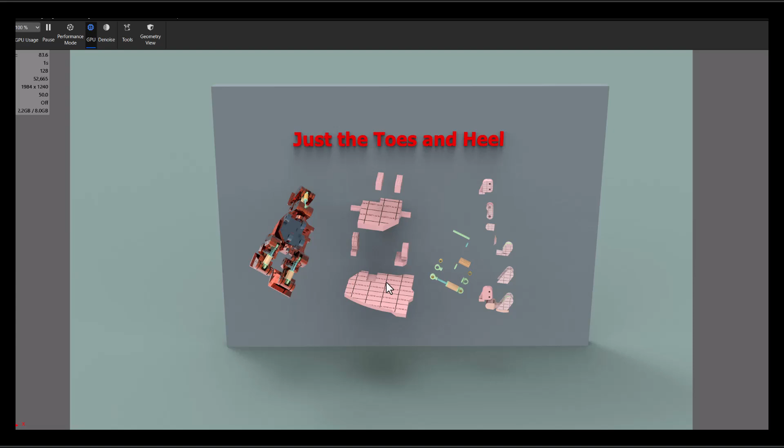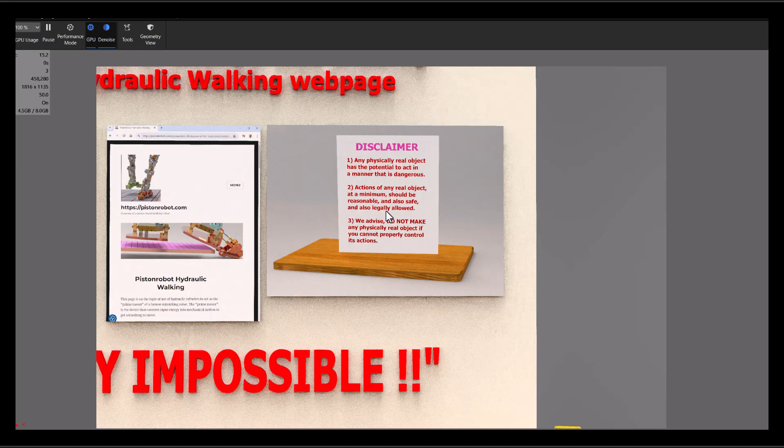And we're talking about creating a physically real item. I want to demonstrate that I am correct about these hydraulic cylinders, but it is a real structure that has fluid and pressure in it, and that is an element. It's a pressure vessel. Any physically real object could potentially hurt somebody.

And my advice is, if you are managing a physically real item, you should manage it in a manner that is legally allowed and reasonable and safe. And if you cannot manage it in that manner, then it is my advice that you do not create it as a physically real item. And now we'll go look at some other things.

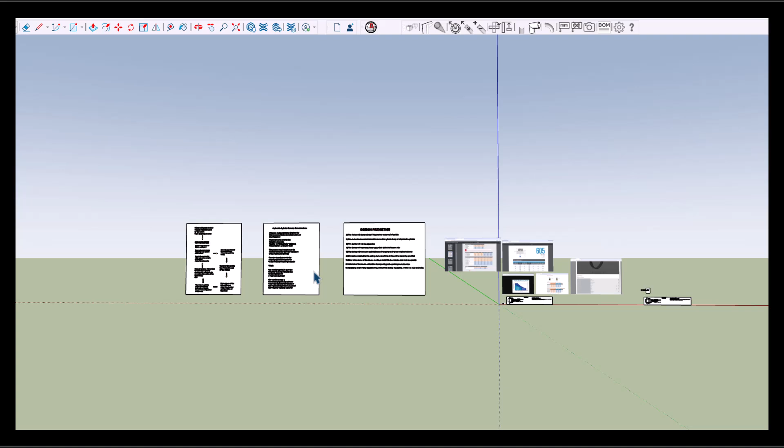All right, let's take a look at some of the drawings. And we will take the robots and tell them thank you. Thank you for parading around and showing us how skillful you are as robots. And let's look at the drawing files. And I know there's always an interest in the drawings. And I don't mind the drawings, but I don't think this makes a whole lot of sense if I don't first get out what it is that I'm talking about.

What is the issue? And this to me is just a flow diagram of what's going on with the modern way that they work with robots. And these are human beings that send information to the computer inside the robot, and these people are telling the robot what they want it to do. And the robot central processing unit runs calculations and looks at its algorithms and makes these requests into actual physical commands from the central processing unit.

And these commands are then sent over a network inside the robot to the prime movers of the robot. And these are commands for these prime movers to do something, move something, and they do. And when they make these motions of themselves, they move the robot, and that movement of the robot is noticed by the sensory system, because the sensory system is always monitoring the robot, sensing what's going on, preparing a package of data of the status of the robot, and sending that package of digitized sensory data back up to the central processing unit saying this is what has just happened to the robot.

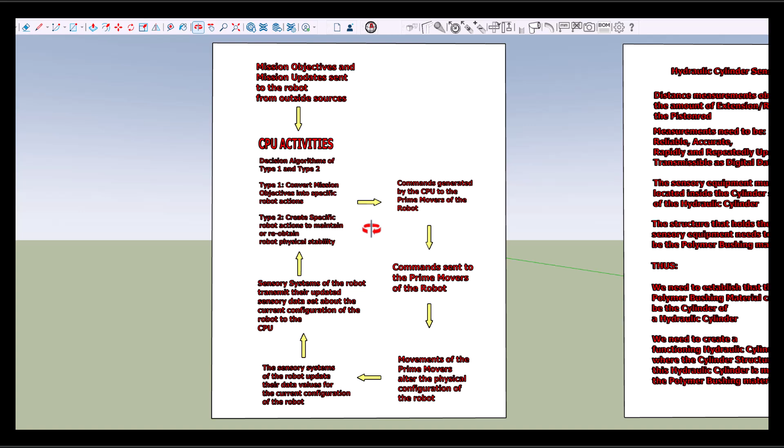And the issue that I'm discussing is that hydraulic cylinders, on a very specific topic of human mimicking robots, if you want to mimic a human being in terms of the power, the strength, the speed, the fluidity, the grace, the beauty of human motion, particularly with a 6-foot-tall robot that weighs 180 pounds, you're not going to do that with electric motor gearhead systems by themselves because they don't have enough power.

And in the hydraulic cylinder sensory world, you need measurement of the extension and retraction of the piston rod, because that's how the sensory system useful to the central processing unit will want information from the hydraulic cylinders. And it needs to be reliable, accurate, rapidly, repeatedly updated. It has to be created and then converted into digital information that can be sent out over a network so that it can go from the sensor to the central processing unit.

The sensory equipment has to be inside the cylinder structure of the hydraulic cylinder, because the hydraulic cylinder itself is made of metal and strong and thick, and there's no extra clearances in there, and you can't put your sensory equipment outside of the hydraulic cylinder and have it sense what's going on inside the hydraulic cylinder. That's too complicated and too expensive.

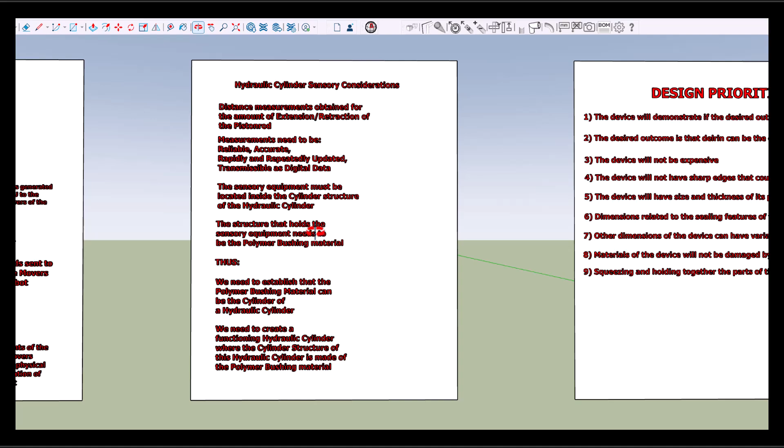I think what we need to do is create a polymer bushing material inside the hydraulic cylinder, because the space inside the polymer bushing material is a space where we can put our sensory equipment. And what I want to do, first thing, is to show that the polymer bushing material can be the cylinder of a hydraulic cylinder. So we need to have a functioning hydraulic cylinder where the cylinder structure is made of the polymer bushing material. And I guess I should take a look at a hydraulic cylinder real quick.

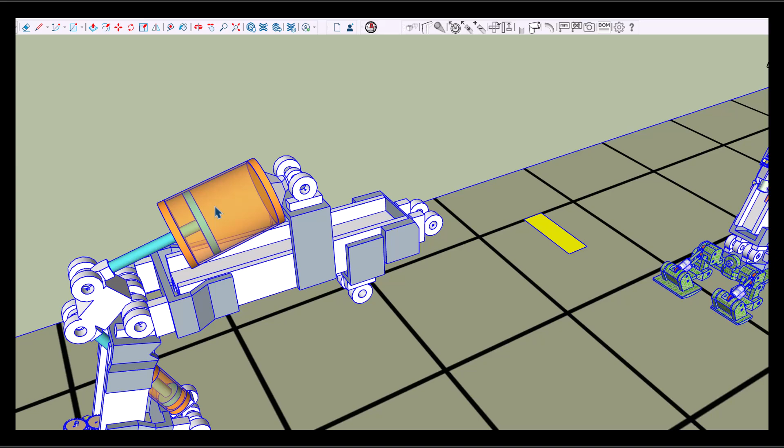And this is the robot. Now, this is back when the robot didn't have arms. But this entire structure is a hydraulic cylinder. And the hydraulic cylinder has a connector on one end. It has an end cap on one end. It has what I call, and this is me just making up definitions, but I'm going to call this structure here the body, or the cylinder body, of the hydraulic cylinder.

So this is not the hydraulic cylinder. This is just the cylinder body, but it's this body that I think needs to be made out of the polymer bushing material. And this entire structure is actually a hydraulic cylinder under the mechanical engineering concepts. And we'll go back to where we were.

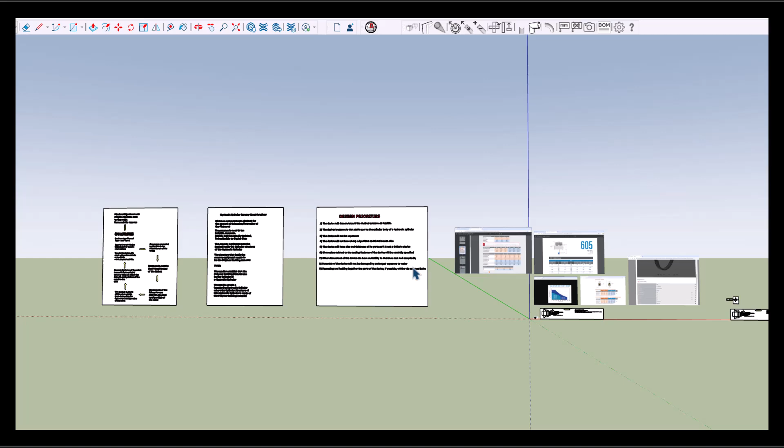And it's the drawings, the drawings, the drawings. Where are the drawings? Where are they?

But I wanted to say a few things about creating something. And I did surgery for a while, for years. And one thing about surgery, you put someone to sleep, you cut them open, you go in there and work around, you get everything the way it needs to be and fix the problem, sew it all back up again, wake them up, you come up there and talk to them, and the next day in the morning you're like, well, you know, I've been thinking about what I did and I'm not so sure I like it.

And so my thinking here would be, let's take you back to the operating room, put you to sleep again, cut you open, and mess around in there, put it all back together again, and let's see how that works. And what you can intuitively understand about human beings is they do not want to do that.

And so my approach to these concepts of creating and working with physical parts is I don't want to make it 3 times. I don't want to fix it. I don't want to test it. It doesn't work. Throw it away. Make another one. Modify that. See what it does. Throw it away. I don't want to do that. I want to think about it and consider it and ruminate and then create it. And the very first time I create it, I want it to work perfectly.

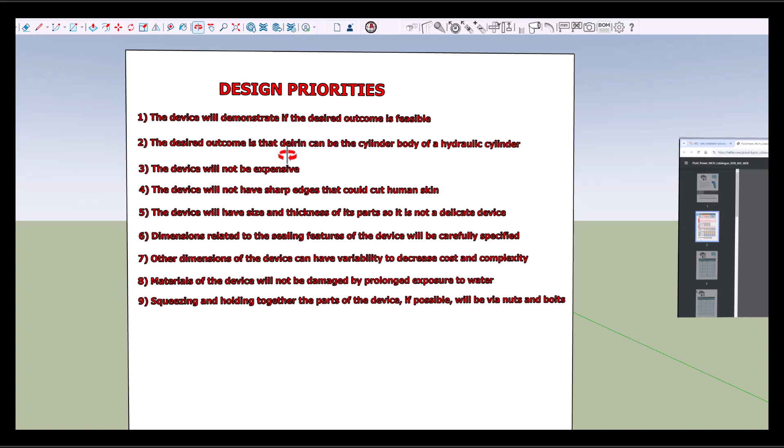So I know the mechanical people are just like, yeah, well, dream on. But I think you can do that as long as you have that as a point of view. And what I want most of all is that it will demonstrate what I'm trying to demonstrate. I want it to work. And the outcome I'm looking at is Delrin, the polymer of formaldehyde, polyoxymethylene, which is created apparently initially by DuPont, and they named it Delrin, that plastic polymer material could be the cylinder body of a hydraulic cylinder.

I do want it that this is not expensive because I have to pay for it. It's remarkable to me that the robot people just have no interest. It's weird, but that's another story.

I don't think when we're fabricating structures out of metal that we should have parts of it that are sharp enough to cut the human skin. I know I'm going to have to put it together and take it apart and put it together and take it apart because I'm testing things. And an absolutely perfect machined right angle, that edge is sharp enough to cut a finger, I think. And so I'm hoping for mostly rounded edges.

Also, every accident I took care of with human beings, they didn't wake up and say, well, today I'm going to go have a car accident and let's see what happens. So I'm not planning to drop this thing. I'm not going to work on it over concrete, but there's always a chance it could slip out of my hand and fall onto the table or maybe fall onto the floor.

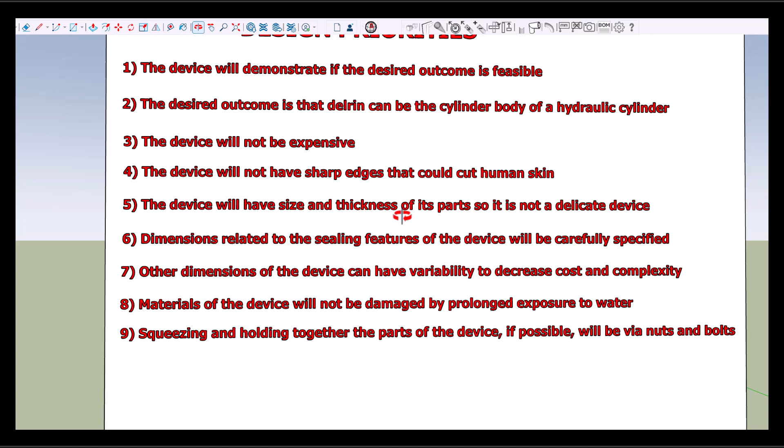I don't want it to be so delicate and so carefully constructed that if it slips and falls, it breaks, or it slips, it falls, it hits the table or the floor, and some part of it bends and makes the whole thing not work. I don't want to do that.

I've been surprised with respect to making a hydraulically pressurized device that will not leak. The people that make seal-up things, seal it so it won't leak fluid, not ceiling like the thing at the top of your room, they are very, very, very specific about how to do this. And I think hydraulics have been around for 140 years. And they don't want people mad at them.

And sometimes what's inside pressurized hydraulic systems are materials that are expensive or valuable or dangerous or reactive, and they don't want it to leak. And they're like, if you will listen to us, it won't leak. And thus, features of this device related to sealing it so it won't leak fluid, I think those features have to be pretty specific. The rest of the dimensions of this structure are simply, I just said, well, how does that look? That seems okay.

I wanted to have rounded edges. I wanted to have enough thickness that it won't break. But I'm happy to defer. I don't run CNC machines. And somebody might say, yeah, well, we can make what you said and it will cost $47. But if you will just listen to us, we're going to keep all the sealing features so it doesn't leak. But if you let us do this and that, we can make it for $8.

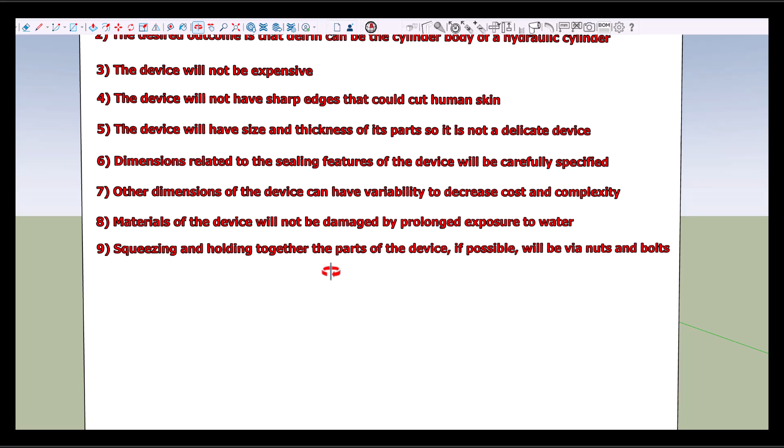And I'm going to say, yeah, that's okay with me. And in terms of, well, it might be $8, but it's not going to be this beautiful piece of jewelry that you have created. And my opinion is, I don't care what it looks like. I just want it to work. I do want the hydraulic fluid in it to be water because I want something that's non-toxic, available, safe, inexpensive.

I do think I'm going to have to put it together and take it apart, and it spills out all of its hydraulic fluid. Well, what do I care? I can go over to the sink and fill a glass up with water, a plastic cup up with water, and refill it.

I like putting mechanical parts together where, if at all possible, I would like there to be bolts, and the bolts are connected to nuts, and the nut and the bolt are screwed together, and that squeezing force is what puts the object together. And the purpose of that is when you have a very valuable metal object that is important and you paid for it and created it, and you have to put a bolt in there and tighten it, if you strip it, you've wrecked it.

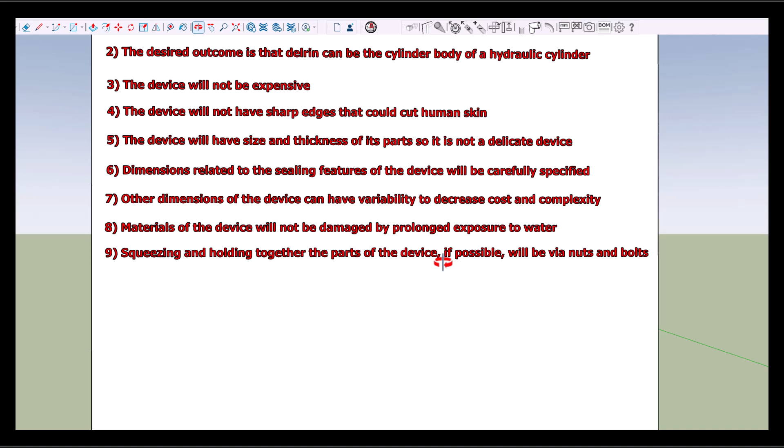On the other hand, if you put a bolt and a nut in there and somehow you manage to strip it, you have stripped the bolt. And you just back it all off or cut the bolt and get another one. And you haven't really done anything to your structure. So these are just some design priorities. I thought I would bring those points out.

All right, so now we can do some discussion about sealing. And again, that's SEAL, not the ceiling up above your head. And the issues associated with sealing: the hydraulic equipment has been around for 150 years or more. And what happens is words that describe things are there, and then different words are used, and then hydraulics are used for the concept of a valve and to seal a valve, and then they're used for construction equipment.

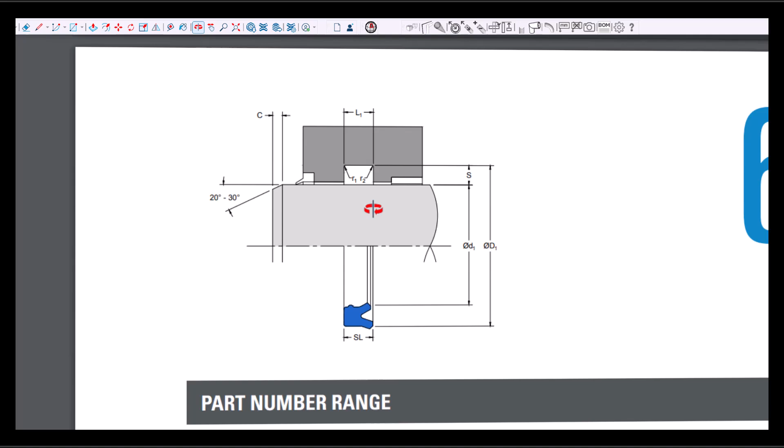And what happens is all of these parts have a variety of different names, and they're all talking about the same thing. And I don't mind that. It's just weird. And so this is the piston rod that goes back and forth, and this is the thing that the piston rod is going back and forth in. And sometimes they call this a gland, G-L-A-N-D, and sometimes they call it a housing, and sometimes they don't say what it is. But this is the part that's moving back and forth. This is the part that's not.

And the issues that are associated with this are something. So the hydraulic fluid is in here, and the hydraulic fluid wants to leak out. So they put something in here to keep the hydraulic fluid from leaking out. But the other thing that matters is this is metal, and it has to be taken to a very fine roughness. This is the piston rod. And you don't want the piston rod to run into the housing, because if it does, then the housing will scratch the piston rod. And once the piston rod is scratched, that scratch acts like a plow that just digs apart this soft seal and ruins it.

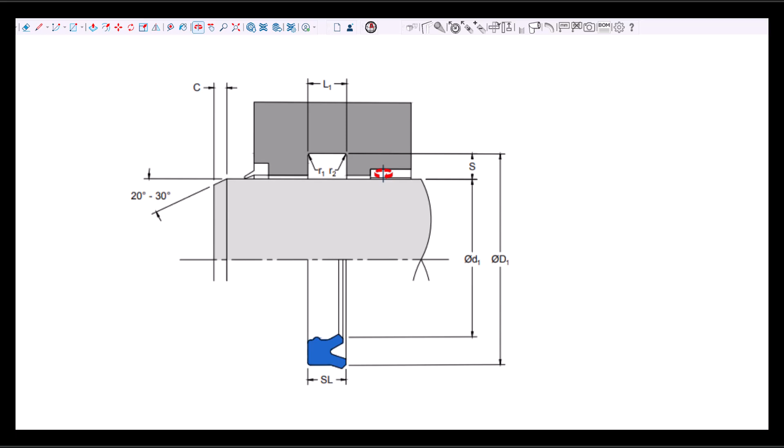So the hydraulic sealing system for moving parts is actually built in two parts. One part is the soft, flexible sealing material that keeps the fluid from leaking out, but there's another part in here that they call a bearing or a spacer or a bunch of other words. And this thing is a padding material that prevents the piston rod from running into the housing. And that just goes on and on and on.

And then they have specifications for, not only is it important what the dimensions are, but it's important what the radiuses are and what radiuses are allowed. And the final thing that's important is what is the roughness of the edges. And those are three separate issues. And I'm going to use a big D. That's sort of the diameter of the hydraulic cylinder. And this is the diameter of the rod. And so the rod I'm going to use is 1/2 inch in diameter. And the piston, the cylinder, is going to be 1 inch in diameter, inside diameter.

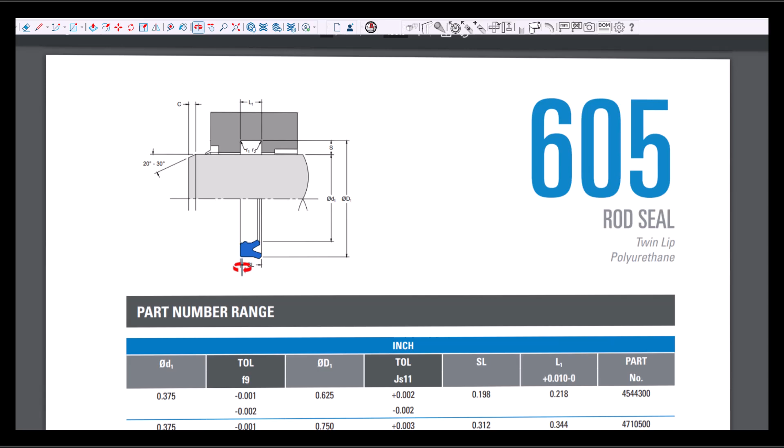So you have to go find little d, 1/2 inch, and it gives you tolerances, and it gives you about how big this distance is that this seal is going to fit into, and it gives you the length of this. And then you'll notice that the length of this is 0.187, but this is what they call a groove. Like I said, all of this technology, names and conventions of how they say things goes back forever. This is the groove, and this is the length of the groove. So the SL, the seal length for a half-inch seal is 0.187, but the groove length is 0.207. You'll notice all of these are accurate to 3 places, so they're not kidding. It's very important that it's just done just right.

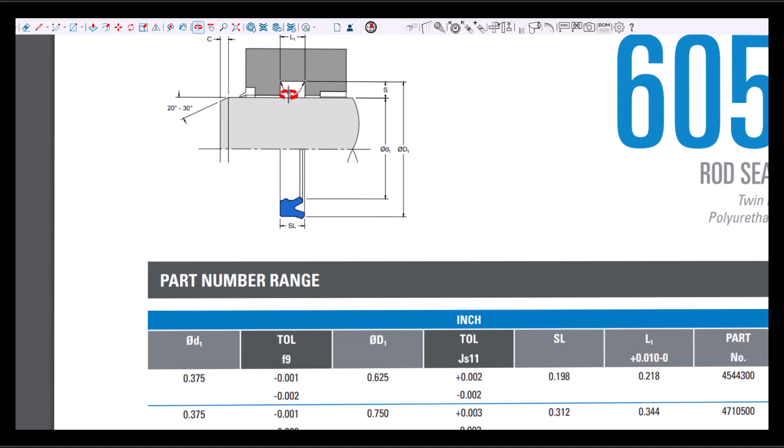Now, there's a thing called extrusion, and I think I'll get to that, but extrusion is where the pressure is enough that it starts pushing the seal into this. Okay, here's the piston rod, here's the housing, here's the seal, and it pushes the seal into this space right here, and that's called an extrusion, and that breaks this and ruins it. And this distance is called the maximum allowed extrusion distance, and this distance has to be small enough that the pressure you're working with will not ruin your seal.

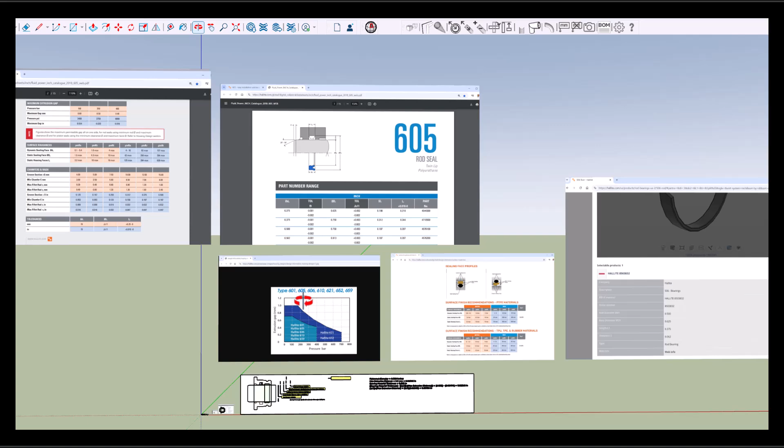And so they give you, this is from Hallite, and Hallite is all over the place, including Asia. So yay, I think we can get these parts and have them mailed. I might be able to go to Amazon and put your address in there. But this is the Hallite 605 rod seal, twin lip polyurethane, can be used in water. And what they give here is, and this I think is like 3,000 pounds per square inch, and I'm going to be way down here at 20 pounds per square inch.

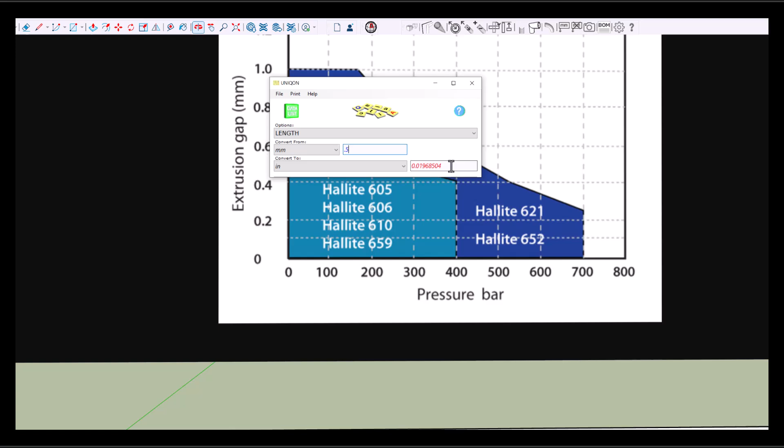But the 605 can have an extrusion gap in millimeters, and I picked 0.5 millimeters, and I work in America, and we use those numbers that Americans use. So we'll convert millimeters to inches. And so 0.5, and this is the way it goes. This goes on and on like this, but 0.5 millimeters is 0.01968 inches. And we're going to see this number over and over again.

All right. So now, I tried a whole bunch of different ways to design this, and I'm going to get back to all that. But these are screen captures where I took a picture of what I found on the internet. And I did want to show you that I made for you a PDF document, 72 megabytes, of all of these screen captures. And we'll go see what that looks like.

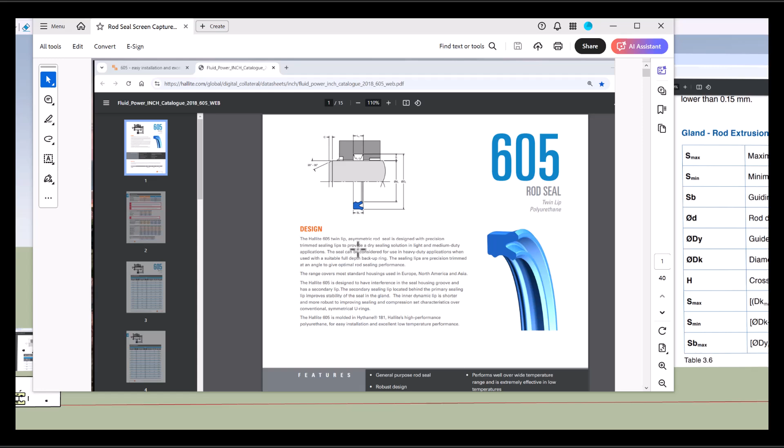And this is showing here in my Adobe, but it's a collection of 40 screen captures. So you can see over here, well, it's big enough. Another thing, Adobe is always trying to help you, and I wish they would stop helping, but they don't.

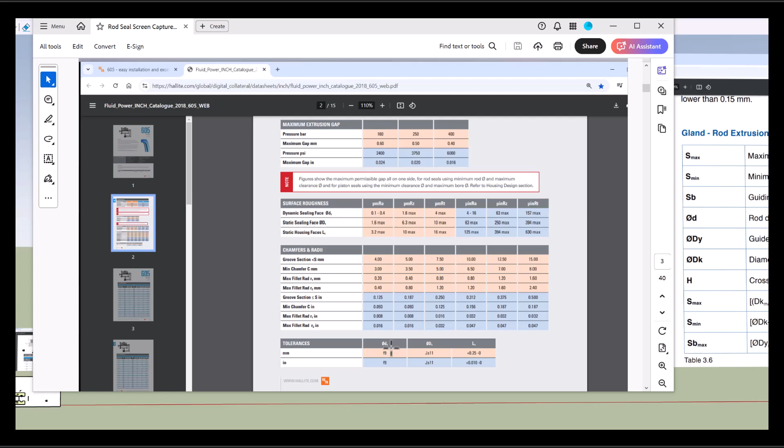But anyway, see, so there is page 2, and this is for that 605, it's the dynamic sealing face, the roughness, the static faces, the roughness, the chamfer, the minimum. These are tolerances. These are specifications that exist for this equipment, and it goes on and on and on. And what I'm showing you is just all of the different screen captures that I have, so that you can learn about this sealing issue.

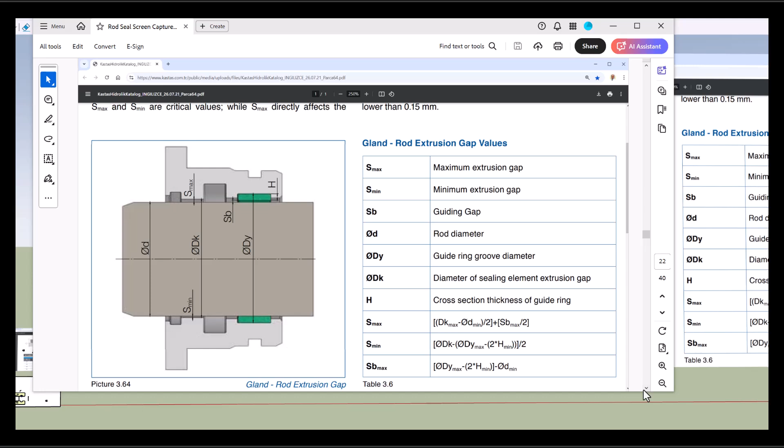You can go out on the internet. All of this is free, but I just thought I would show you all this. And here they go over the surfaces and on and on. Okay, so that's what this is. It's more than you ever wanted to know about sealing. But I'm going to put this in the G drive so you can download this collection of PDF. And these are nothing more than just screen captures of things that I found.

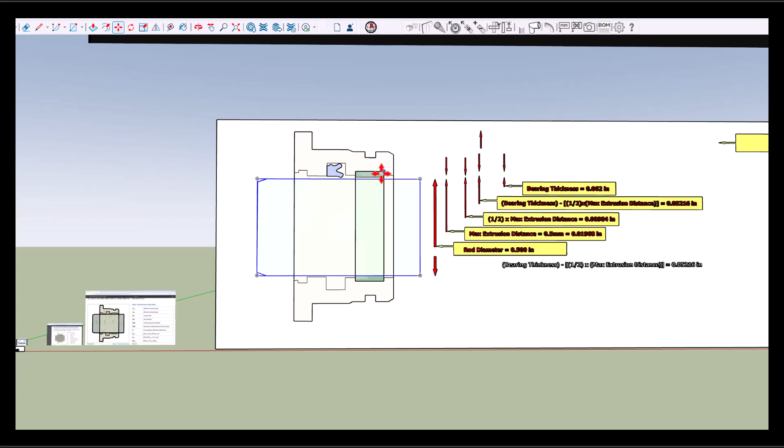All right, so here, and the final thing I'll cover here, this is the piston rod. And the piston rod can bounce up and down inside the housing. Okay? But they don't want the piston rod to run into the housing. So they have this padding material. And the question becomes, say the piston rod went down and ran into the padding material. What has happened is this distance has increased. Okay? And this distance from here to here is your extrusion distance. And so you can't exceed the extrusion distance.

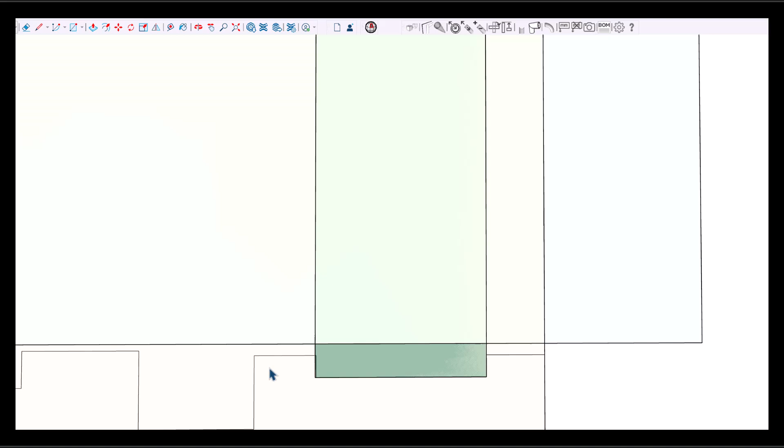And what this means is a set of very complex ways of thinking. But basically, this is the padding material they call the bearing or the spacer. And the amount of the bearing that sticks out of the housing needs to be 1/2 of the maximum extrusion distance. So that if the piston rod thumps itself down this way, when it runs into this, so this piston rod was touching that, and now it's down here, the distance has become equal to the maximum extrusion distance.

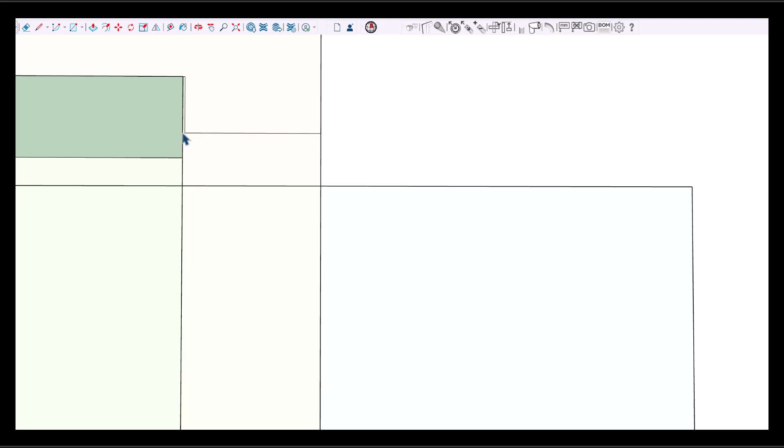And so you get this collection of distances, like the rod diameter, the maximum extrusion distance, 1/2 times the maximum extrusion distance, the bearing thickness minus 1/2. Okay, so the bearing thickness of 0.062 inches, that's this distance from here to here. The bearing sticks out by a distance equal to 1/2 of the maximum extrusion distance, which is 0.00984 inches. So this distance from here to here is 0.00984 inches, and that means that this distance from here to here is the thickness of the padding minus how far it sticks out.

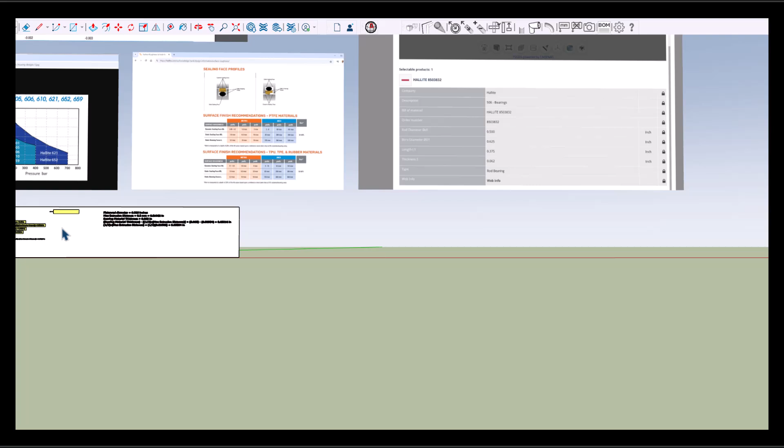And I know you are going, who cares? What difference does it make? But there's no way to figure out the distance from here to there without doing these calculations. And you have to create in your housing this groove where this padding goes. And so there you go. And it's one of those things where if you like math, fine; if you don't like math, you start pulling your hair out.

But this is the beginning of me showing you what I was thinking to do to create this device. And this is a clamp that fits onto this Delrin cylinder and pulls it. And this is the clamp that has the Hallite 506 bearing material and the Hallite 605 sealing material. And this is what's called a split gland.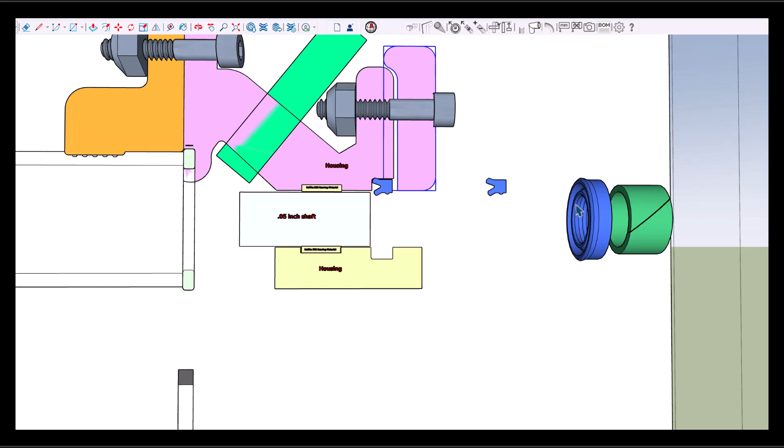Otherwise, you have to take your fingers and try to push this thing up into this groove, which I don't think I can do. So this way, you take this here, get it out of the way, you push this on here, and then you bring this back.

And so this is the square cross-section gasket, which they call an O-ring, although I always thought an O is an O, but this is considered an O-ring. It's just a square cross-section O-ring. And what happens is when you take this nut and bolt and pull it tight, this has grabbed onto the dowel ring and it squeezes the dowel ring up against this, and this square cross-section is squeezed into this shape. That took a long time for me to get that straight.

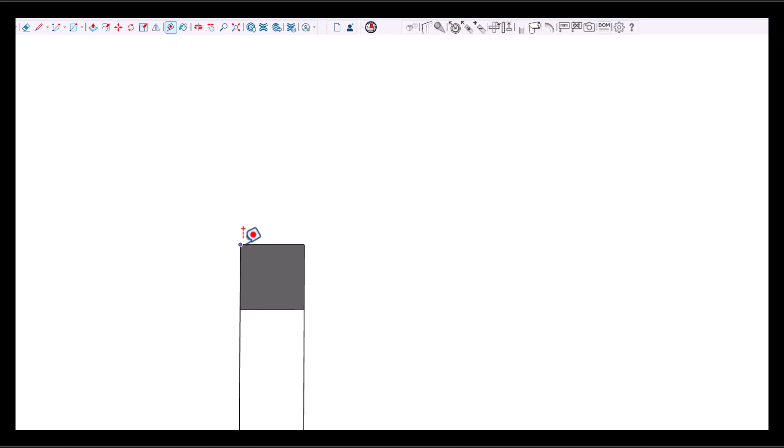That's just amazing. And this is called a 1/8 inch square cross-section O-ring, even though 1/8 is 0.125. The convention is, and I'll just do one thing right here. 13.9. This is times 10. My drawing program works better times 10. So remember that. But the 0.125 1/8 inch square cross-section O-ring is actually 0.139. And again, I think this is because it goes back 150 years.

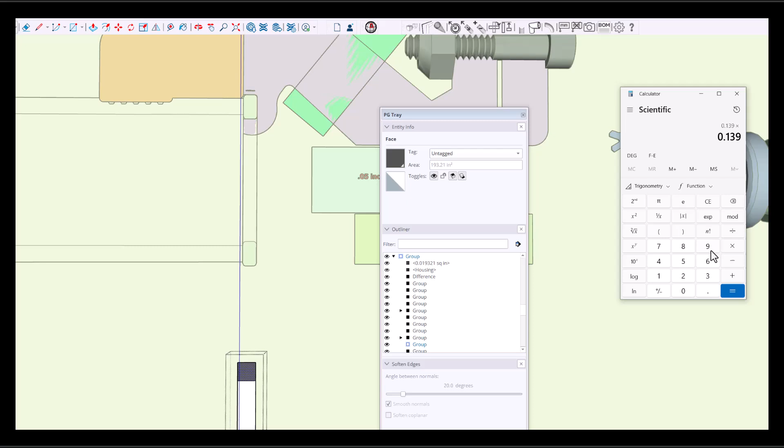All right, I'm going to try to give you a conversation about how complicated this is. And I know you might be thinking, why is this so complicated? But I think it's because the people who do the sealing, again, they don't want it to leak. They don't want something to go wrong. They don't want materials leaking out that are valuable or dangerous.

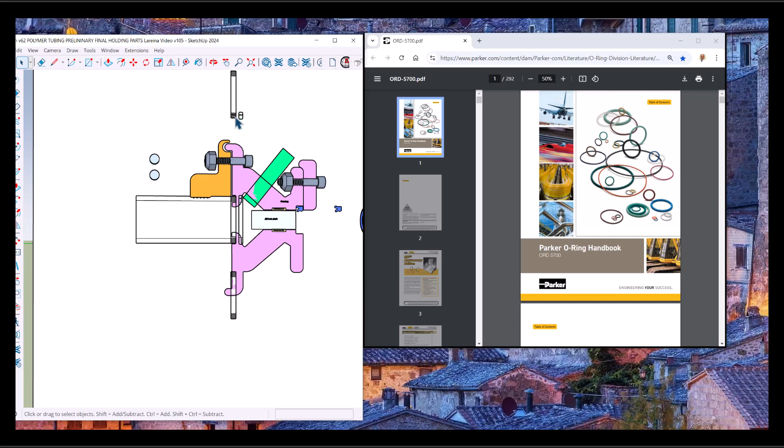So we're talking about, this is the dowel ring, and this orange piece grabbed a hold of it and is going to push it this way. And in here is this 1/8 inch square cross-section O-ring seal. And again, I think I'm on times 100 here, so it's times 10. So it's not 0.125, which is an 1/8 inch. It's 0.139. Where that came from, I don't know. But that's what it is. But that's what it's going to look like when it's not in its compressed condition. So that's important to remember.

And you'll notice that I'm showing that this nut has been pulled out. So it's not compressing it. And this orange, this pulling part, has not pulled this against that. And notice that this orange has jammed its little teeth down into the dowel ring. So when the orange goes this way, and the orange will go this way because someone tightened this nut, it will take this orange and this dowel ring and will push it that way. And it will push this square cross-section O-ring up against this housing.

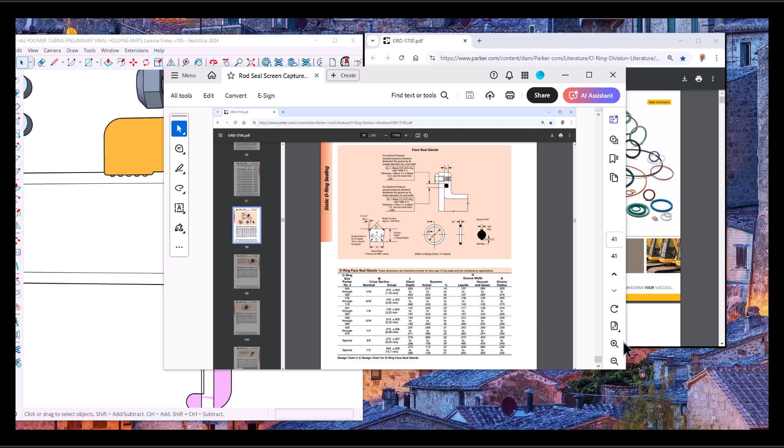And so now I want you to see, here is the PDF. It's 41 pages. So all the way down here on page 41 is all this information about these seals. And that's page 41 of your PDF. And this is page 98 of this Parker Hannifin document. And it gives you all this stuff that you have to have, like the groove itself, the particulars of the groove.

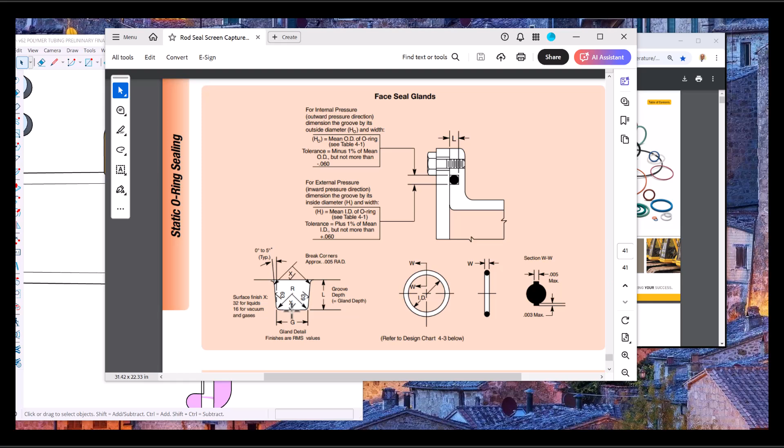This can be 5 degrees off. This radius can be 0.005 inches. This surface roughness is 63 RA. And this surface roughness is for liquids 32 RA. So it just goes on and on and on.

And then the other thing we can look at, we are using a 1/8 inch square cross-section O-ring, even though it's not 1/8 inch, it's 0.139. And it's the Parker Hannifin 201 through 284 series. And so they give acceptable values for the depth of the gland, the amount of squeeze, the groove width, and the R groove radius. I guess that's this radius up here.

Okay? So we take all these numbers that we have, and this is in your PDF. So we're going to take all these numbers and compare them to the actual drawing that I've prepared. And you will see that this is part of the design of this thing where there's not a whole lot. Well, I have to be careful.

As long as it's not too expensive, we should do what they're saying. If this thing starts to get too expensive, this will take it up to 1,500 or 1,800 pounds per square inch. I'm only going to put 20 on there. So it may be that we need to back down some of these dimensions and specifications in order to keep this device from getting too expensive.

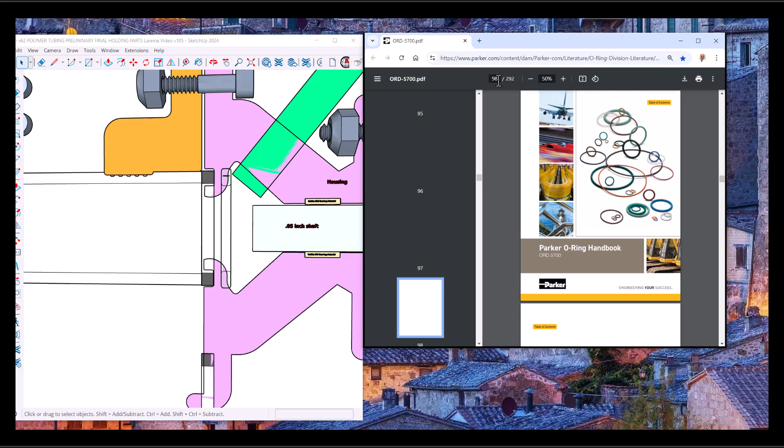All right, so this is your PDF that you will have, page 41. And now we're going to go look at the actual real document. This is the internet here, okay? So this is 292 pages of Parker telling you more than you would ever want to know about O-rings. And we can go to page 98 and we can plus it up a little bit, and you will see that this page is the same page as the page I just showed you, except this is the actual real authentic internet connection. You can go to this internet address and find this.

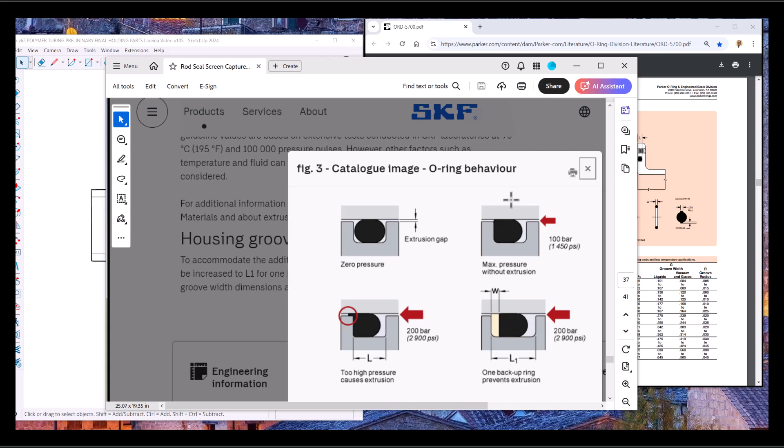And so now we're going to go back over here into my drawing in SketchUp. And here it is pulled apart. And we're going to go down here. And so this is the shape of this. Oh, and I should show you, I'll show you this in your PDF file. So this is your PDF file, and we can go up. This is this thing about extrusion. This is what they're worried about. And I'm going to talk about that a little bit more on the, remember, this is the static seal. This is not the dynamic seal, but we can keep going up. Here it is, right there.

So this is a product that's available for $17. I can give you 50 of these things. I'm hoping I can get on Amazon, I did this with my son one time, and just have Amazon send it to your company. But there it is, actual 0.139. Water. Inside diameter, 1 inch. 0.984. It's good. It'll be stretched a little bit. That's okay. So there it is. So that really exists as a real item. And this again is page 36 of your PDF. So we'll go back over here.

And so this is this structure. And then down here, we put an Allen wrench on this brass socket head screw, and we pulled the nut down, and the nut pulled on this orange thing, and this orange thing is pulling on the dowel ring. I mean, the dowel ring itself squeezed the O-ring. So the O-ring went from this shape to that shape.

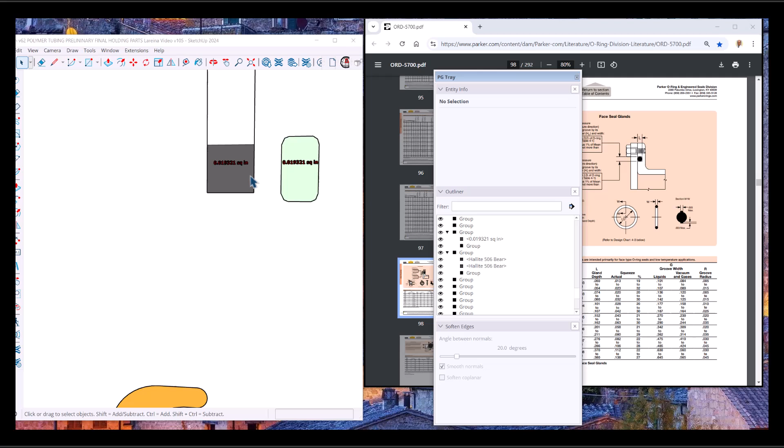And we can see here the cross-sectional area of this, okay, so this is times 10, 0.139 by 0.139, cross-sectional area of, I think it's 0.019 on the real one, but it's 1.932. And then we go over here to the new shape that it took on when we squeezed on it, and it's 1.932. So this amount of rubber can become that amount of rubber, or this shape can convert itself into that shape, and you don't have to remove any rubber. So that's important. Okay.

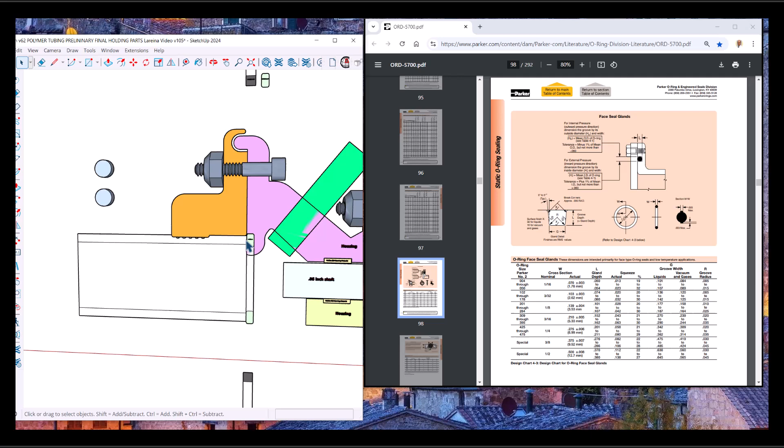And so as we squeeze this thing down, this dowel ring started mashing on this O-ring, and this dowel ring squeezed this O-ring out into this groove. And the only thing we have to do with this groove is reassure ourselves that we're doing okay. And these are some of the things that we want to look at to be sure that this groove is an okay groove. And what I might do is take this O-ring right here and hide it so it's not in there. And so the first thing we can look at is, what is the depth of the groove from here to here?

0.107. So there it is. And we go over here on the 200 level, and they get a gland depth of 0.107. So we're okay on the gland depth. And then the next thing is trying to figure out, somehow there's a way. Oh, there, okay. So there is the, that's this radius.

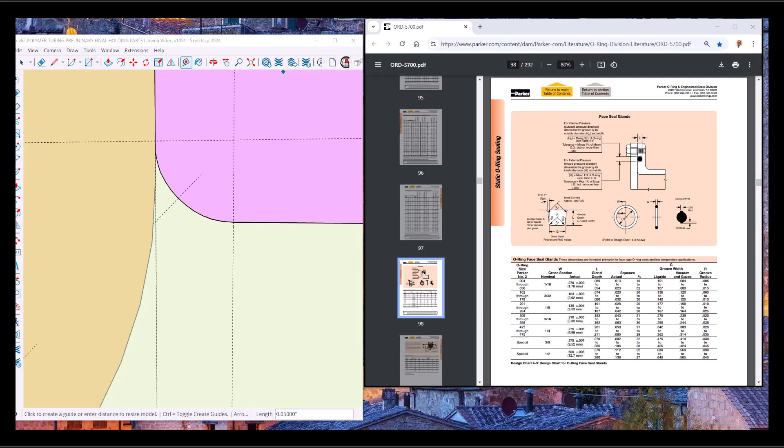All right, I'll try again. And so if we do this in SketchUp and we touch this curve using the measurement feature of SketchUp, this gives us the beginning of that radius to that curve. And that distance from there to there is 0.05, which would be 0.005 because this is times 10. And we can go back over into your PDF file. Or actually, we can just go look right over here, and it says 0.005 is okay. So this little curve right here is 0.005, which agrees with what they're telling us that we can do.

Then we go down here to this curve, and this curve is R, and they give us a value for R on this size is 0.01 to 0.025. So now we got to go measure this. And so again, we can put this there, and we can put this here, and we can measure from here to here. 0.0, so that's 0.2. So, and they're saying 0.02, and over here it says that 0.02 is okay. So we're all right on this curve. It just goes on and on like this.

And now the next thing we want to do is get the width of the groove, and that width is 1.86. So let's go look at the width. 1.87. So we're okay. And this is the complexity of what you have to go through if you want to do this in a way where the people who make this stuff say this will work out okay. And that is the only reason I did it this way. Is complicated. All right, so let's get that done.

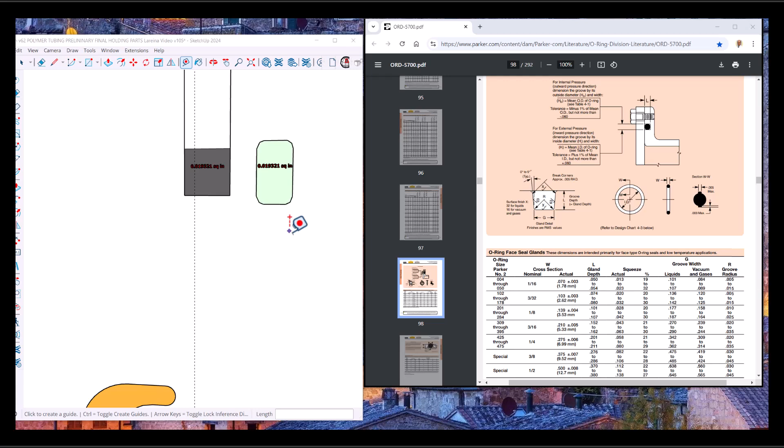All right, so I can export that file out of SketchUp as an FBX file, and then I can import it into Maya. And there's a couple of things you need to do. Maya, there it is. Okay. And here are these two that I was just talking to you about. And there's a couple of things that helps us. Now, one thing is to set the preferences. Set the units to inches.

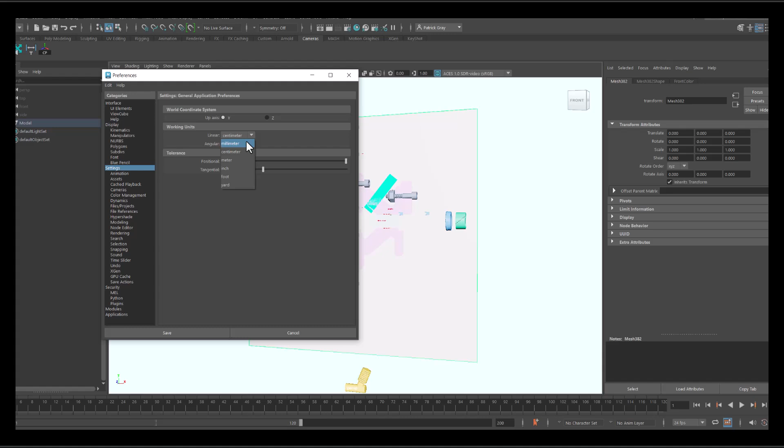And then the next thing is to take this material and make it a Blinn, and make it a little bit easier to see. Let's see. Okay, and then the other one is to take this material and make it a Blinn and get it a little bit darker so that you can see it.

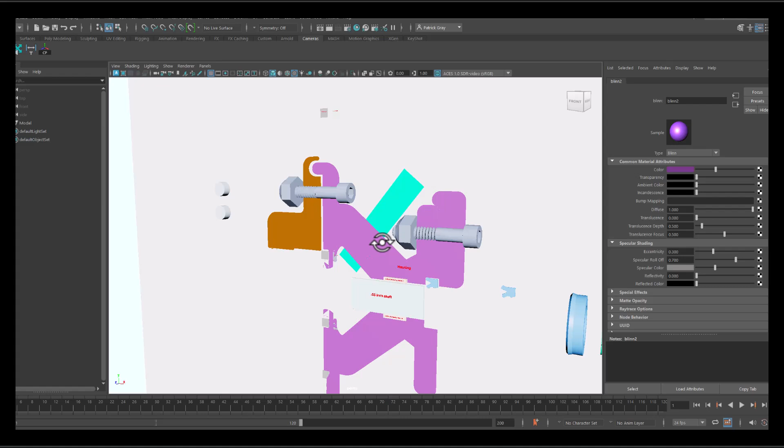Now this is, I'm just putting this in here because there's an access port here for that 1/8 inch national pipe thread fitting. And so that's just something that like this one, well, I don't know how to darken that one, but oh, and the other thing is if you knock down the brightness in Maya and the gamma, things begin to be much nicer. So there it is, okay? And here is this one down here.

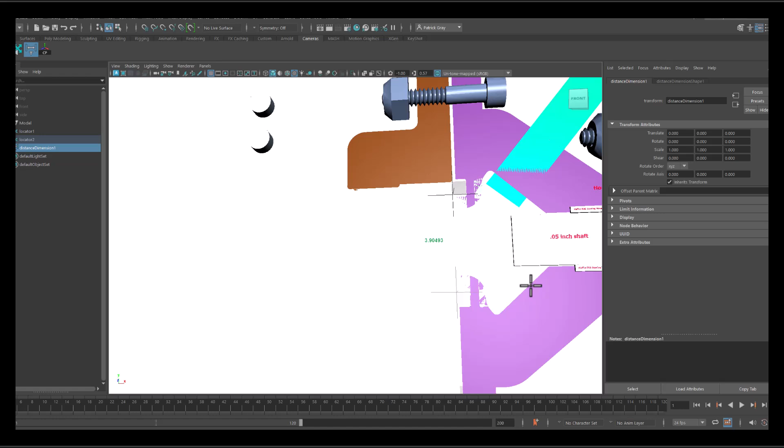So this is the one that's not clamped together. And down below is the one that is. And I think if you do a measurement from, for example, here to there, well, I can't quite see that. Oh, I know. I'm just showing you that it does import into Maya as it should. And it imports into there with appropriate fidelity to sizes.

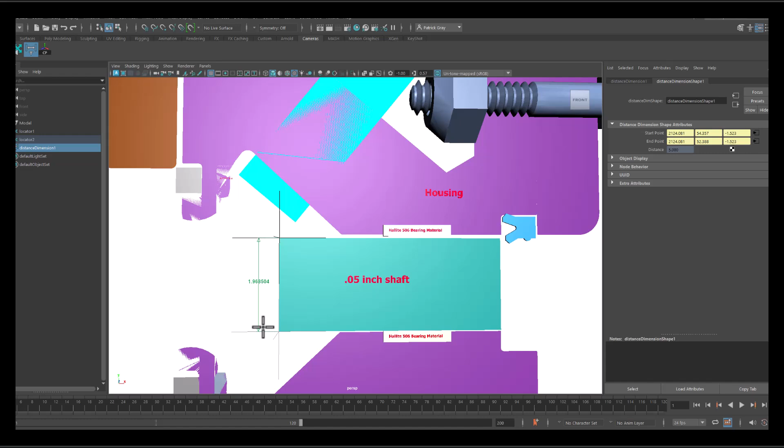So let's see what this measures at. .96, so that's close enough. In other words, it's almost perfect, unless I didn't get these vertexes right. But you should be able to measure things inside of Maya. And I did do it, and I hate to be so hesitant, but I don't use Maya. I think Maya is a wonderful program. It just requires, there's a learning curve. Let's see what we get for this one.

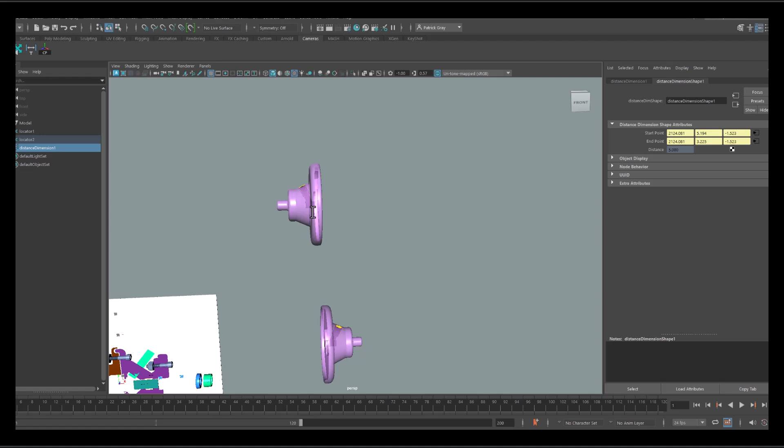.96. So the scale has changed a touch, but at least it brought it in correctly where you can see it. And I did it before, and the scale was perfect. So it might be that I'm not doing this right, but it does pull it into Maya, and all the little parts get pulled into Maya, and so you can open these parts up in your drawing program. Because I think if it opens up in Maya, in Autodesk, it will open up in your drawing programs.

Again, you'll see that I changed the opacity of the material so you can see through it to see what's going on. This is the cylinder end cap on the end that doesn't have the piston rod. And I put this little piece of metal here so you can, I might drill a hole in this. This is solid. And whatever type of end connections you want to put on this thing, you just slide it over that and you put a bolt through there. That's what I was thinking. And this is all inside of Maya.

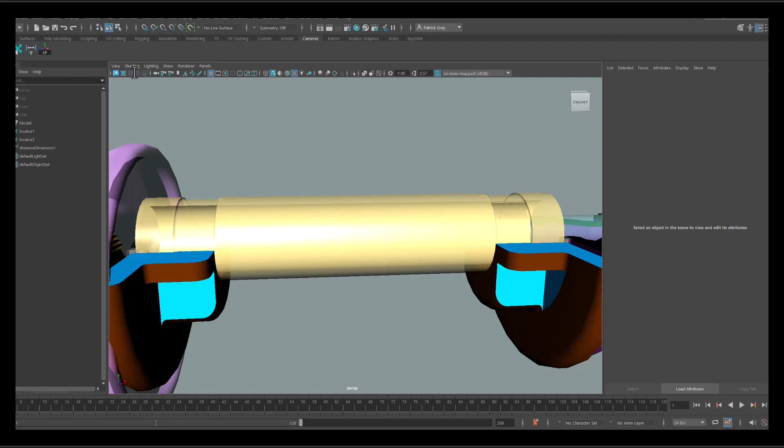And I'm going to go back into SketchUp because I'm just more comfortable with SketchUp. But we made this notch in the Delrin, and then this thing sticks its little teeth. Those teeth, I didn't want them to be sharp because it will cut someone's hand. They're only 1/32 of an inch wide. That's pretty small, and they are bolted on, and so these grab onto this, and when you pull this against that, the reason this can be pulled against that is because this is bolted to that.

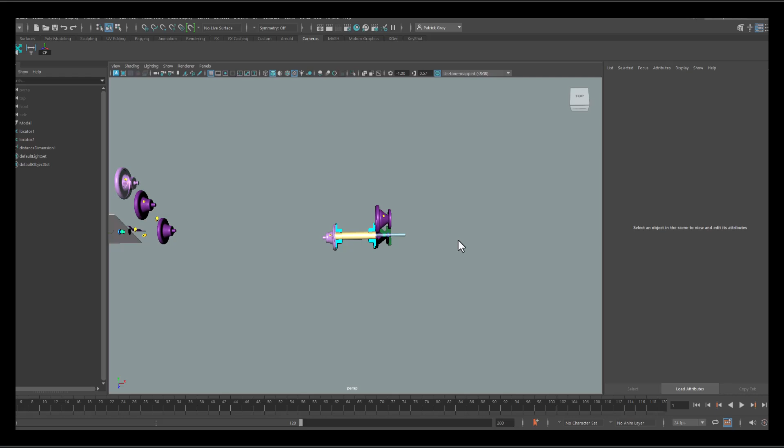And this concept of how this works is over here. All right, so let me select this. Okay, so you can see that this thing that's grabbing onto the Delrin is being held against this thing by these bolts. These are 10-24 bolts. And the accuracy of alignment is determined by the structures inside.

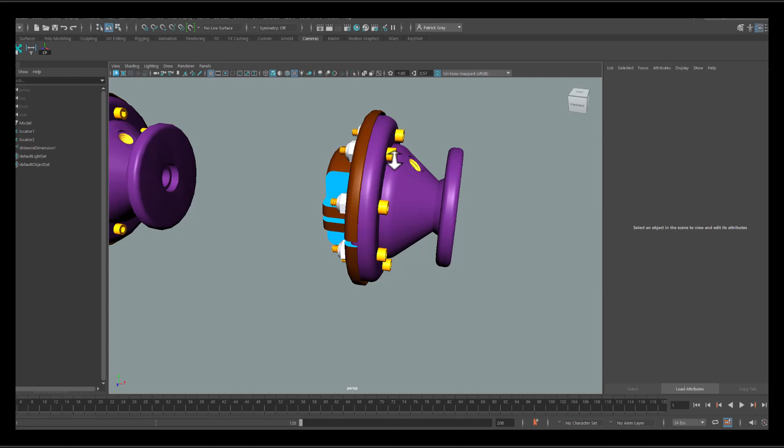And so this 10-24 bolt is a 0.19 diameter, and the holes that I put in here are 0.22 in diameter, because I don't want to take these bolts and be fighting to get them to go through there. So these are not going through here in a manner where their objective is to perfectly align this thing. That alignment is caused by this Delrin being pushed up against this. So that's important.

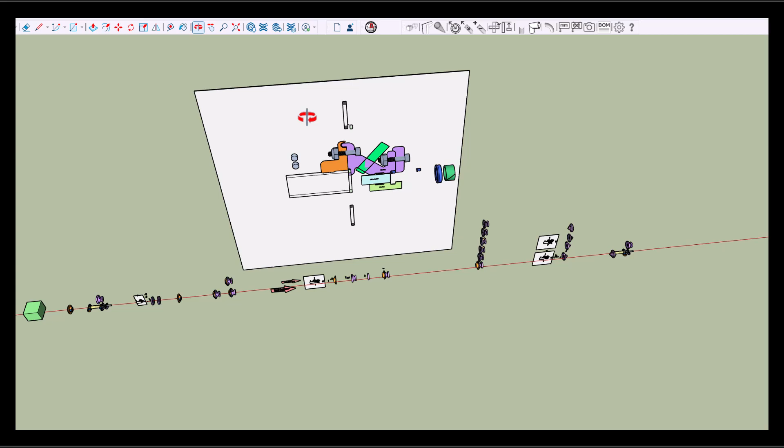All right, so enough of Maya. All right, and we're back out in SketchUp, and this is the drawing showing it. And it is actually going to be very important. There's going to be a piston in here, that this is lined up because of the tightness of these dimensions. And if these bolts that are holding it together are not perfectly aligned, there is a possibility, I'm going to have to think about this, but I feel there's a possibility that we may have to, I put this up here just to help it come together, but it could be that this is going to need to be modified.

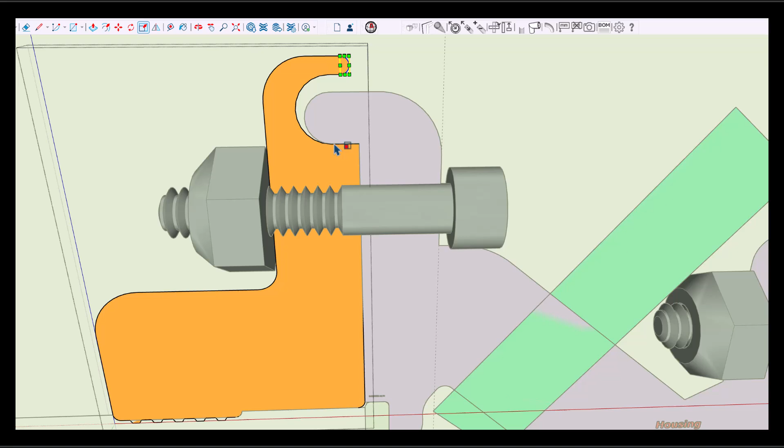To be this condition. And the purpose of that will be if this is touching this edge, then that holds it perfectly aligned, which is sad because it makes the accuracy of these to be much more critical. And I'm going to have to think about it. It just may be that I have to do that. We'll bring this down a little bit. Well, it's not easy to fix this. But anyway, this curve will probably need to be more like this. But I'll get that. This is a preliminary movie anyway.

But if that was touching, I would make this maybe 1/1000th of an inch larger, because when they're absolutely exactly right on, it's been my experience, you wind up with parts where you can't get it to go together because something is slightly off. I don't think 1/1000th of an inch is going to make a difference, or 2/1000ths. But that's something to consider. All right, and so now we'll take a look at how this all goes together.

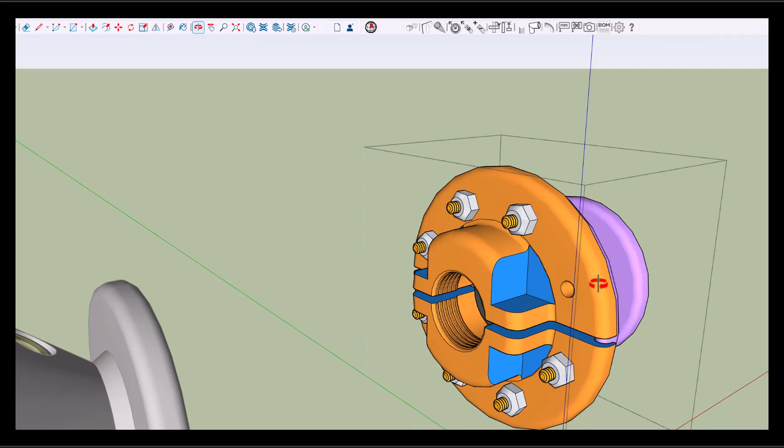Oh, and I wanted to show you, I went in there and I drilled the holes through, okay? So there's a hole that goes from here to there. And so that bolt is in there, and this orange thing has grabbed onto the Delrin. Okay, it's grabbed onto the Delrin, and then when you take these bolts and pull the purple against the orange, it pulls in the Delrin. So that's how that works.

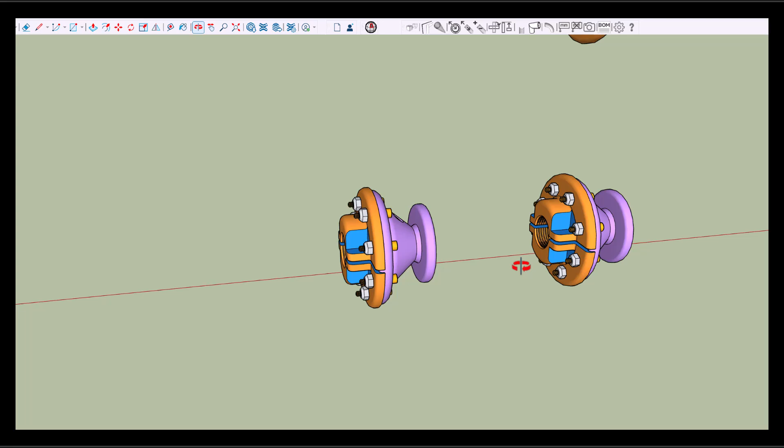And the other thing I wanted to show you was, and I think I've already demonstrated some of this, but this also has a hole in it here to allow one of these bolts to go from here to here. So the first step that you do is you take this orange piece and you put it on the Delrin. There's two pieces, one that goes below and one that goes above, and then you put the bolt in there and bolt it together. I think I've already shown you that.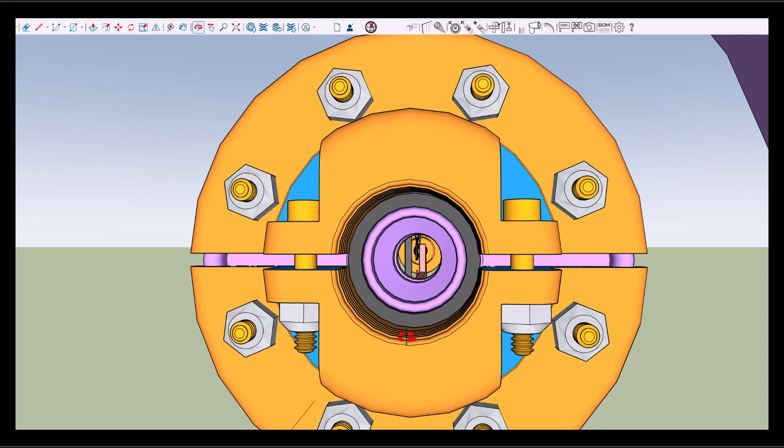All right, and so I drew that in for you real quick. This is another one of those brass hex head bolts with the stainless steel nylon insert lock nuts, and they will be on one here and one here, and they squeeze this upper part against this lower part, and it takes these little 1/32 inch wide ridges and pushes them down into the dowel ring. So that's the full device.

And the other thing, this is what we call a split gland. So this is pushed up against that by these bolts, and we have to be careful that when we put this in with respect to the angulation of it, that you don't wind up with this or that. There's a short list of where this can go so that it works like it's supposed to. Because this comes down and curves around so that you can bolt this second half of the gland to the first half of the gland. That's the purpose of that design.

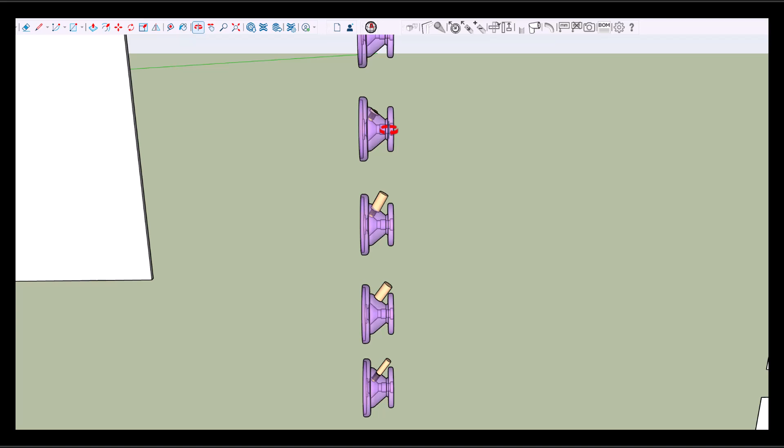And this is how I did this. Here is what that copper or brass pipe is going to look like. And I actually felt like you probably need to take your CNC machine and grind in a flat first. And then, this is not a National Pipe thread. This is just me making something that looks like a thread, but that's what you cut in there. The National Pipe thread is tapered. And there's all sorts of stuff like this on the internet.

Hopefully your system creates a National Pipe thread without any issues, but the National Pipe thread, they've kind of exaggerated this, but the male has a taper to it and the female has a similar taper, but they're not the same. So that as you take the male National Pipe thread fitting and screw it into the female National Pipe thread it begins to tighten up so that it becomes water or fluid tight. And so National Pipe thread, that's what this is.

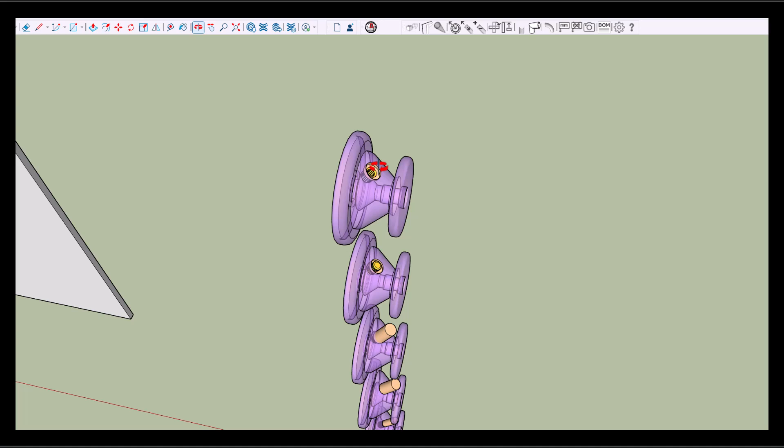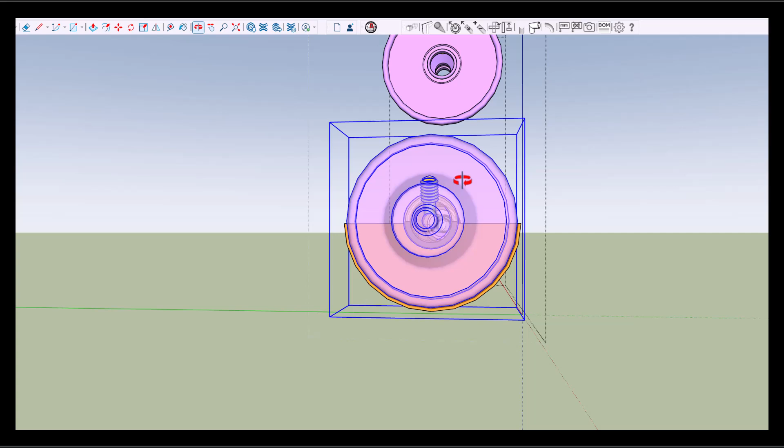And the other thing to show is on the other side of this, so this is the one that has this seal for the piston rod, but on the other end is another seal that just seals it up. This and this are the same. You can see that I did not match this up quite right. I was hurrying. But it's the same principle of how it works. The internal mechanics of this static seal over here is the same as over here.

And this has inside of it a 1/8 inch National Pipe thread fitting so that you can introduce hydraulic fluid into this side also. And this, I'm probably going to put a 1/4 inch hole in this so that you can take all sorts of different connectors and just put them on there. All right.

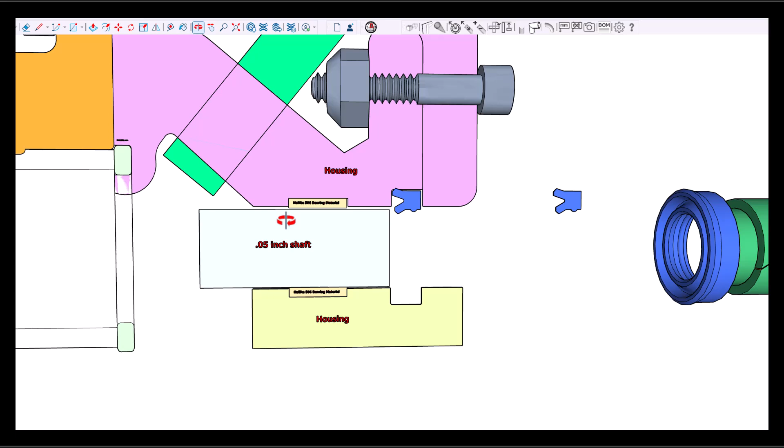The one thing I need to discuss is that a static seal is where one structure is not moving with respect to the other structure. That's a static seal. This spacer is a static seal. But a dynamic seal is where one thing is held still and the other thing is moving. So this piston rod shaft moves past this seal. So that's a dynamic seal. And this spacer is a static seal here, a static seal there, a static seal there, and a dynamic seal there. And so there's all sorts of specifications about surface roughness.

Interestingly enough, I was not able to find any specification of whether there can be a corner radius on this spacer, or whether, if this is listed as being 0.375 inches from here to here, are you supposed to have a little extra space in here in this groove so that this fits in there? I was not able to figure that out. I'm hoping I can buy some of this and send it to you, and you can measure it with your calipers.

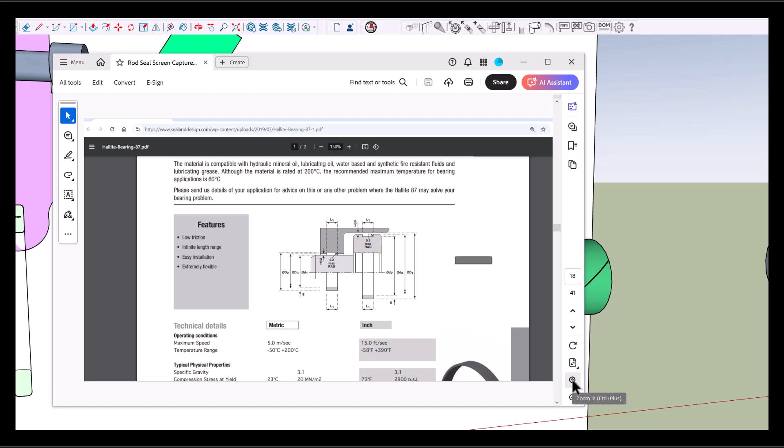In your PDF that I sent you, it's page 18, and this is from Hallite, it shows a radius of 0.2 for this internal turn on the bearing. And they list the width of it, tolerances, as minus 0.1 to minus 0.5. That's probably millimeters.

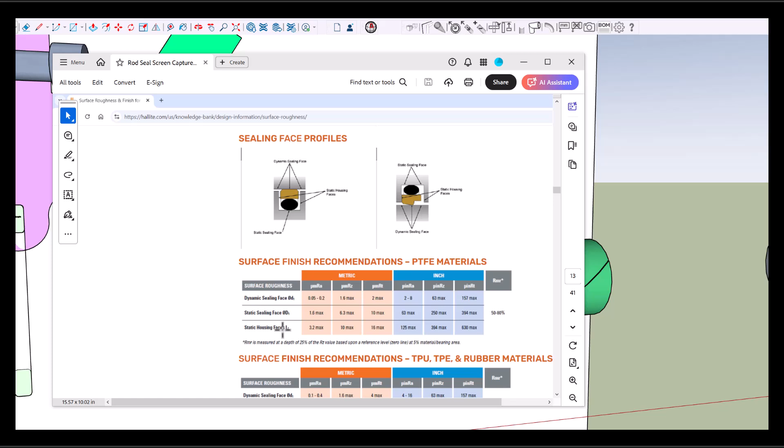This is listing the RA that they want on the piston rod surface of 2 to 8 microinches. The RA that they want on the static sealing face, the back of it, is 63. And on the static housing faces, down the sides of it, is 125. Surface roughness RA values. I'm sorry, that was polytetrafluoroethylene.

For the rubber, again, for the face of the piston rod, that can be 4 to 16 microinches RA. And again, the static sealing face up here can be 63 RA, and the sides of it can be 125 RA. And you can see that this is page 13 of your PDF. And this is going back and forth between page 4 and page 3 of your PDF.

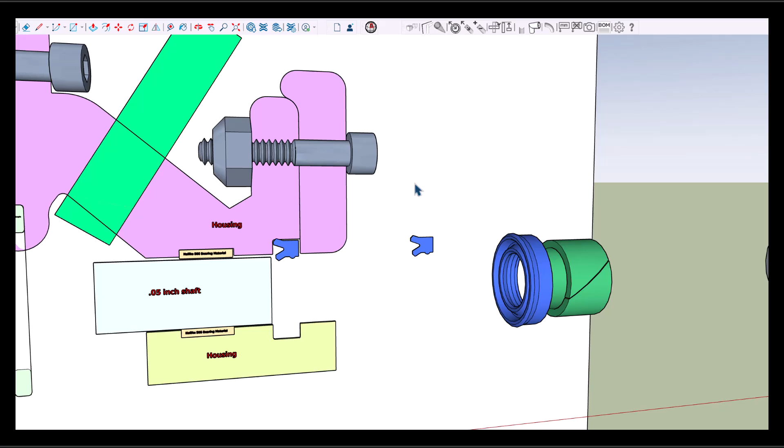All right, so let's talk a little bit about sections of this that are what I call optional. All of these dimensions are pretty concretely specified, but these curves I put in here, I just thought that was a good idea. This thickness I put in here seemed like a good thickness to me. I think this is times 10, so this is 0.3 inches. I thought we should have some thickness in here to make this thick enough, because it has this pipe thread, so it's 0.6 inches.

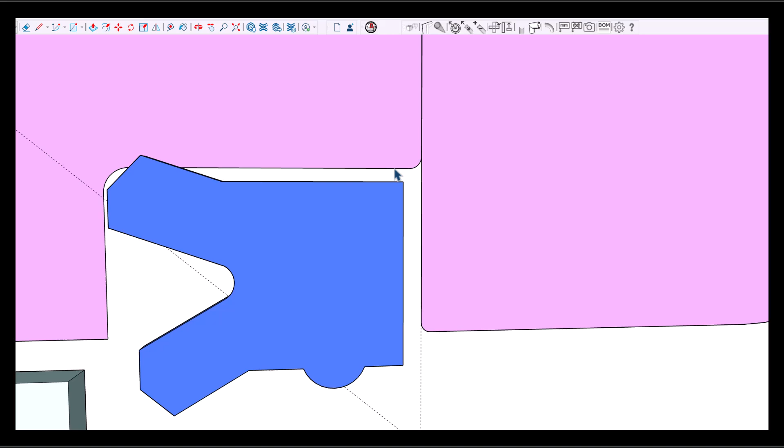Again, this thickness here is 0.35 inches, and this thickness here is 0.36 inches. And these curves are curves created by me that I thought just looked okay. I don't know if they need to be fundamental. This curve here is that 0.061 that they specify for the dynamic valve chamber groove. This curve, I think, is optional.

I'm trying not to put surfaces on here that will cut anybody's fingers. For example, this 0.06 radius can probably be down here too. I forgot to put that in there. On the other end, the

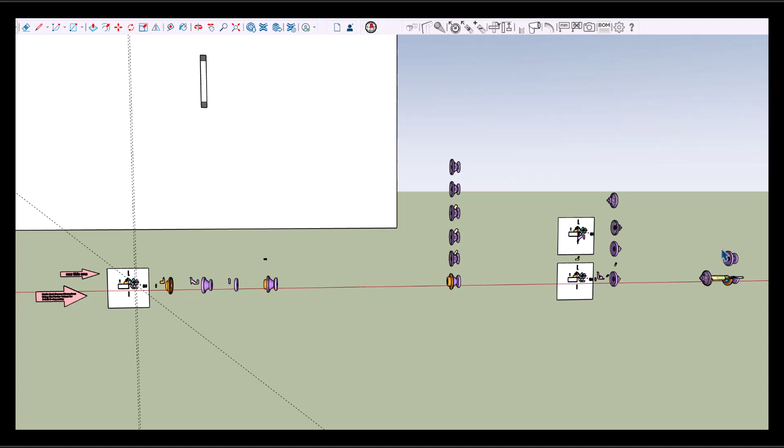Okay, this is the other end cap, but it's drawn facing that way because I was using this drawing, because this part of it is the same. So this entire other end cap is drawn facing that way, and at the very end of it, you can just take this in SketchUp and make this -1. And it flips it so it points in the other direction. And that's all that this is.

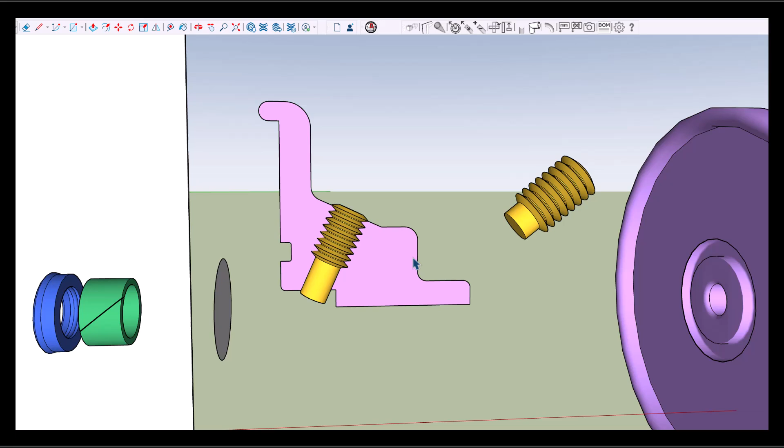But this entire structure here, the purpose of this structure is to seal it up. For example, all of these curves are just by me. And this thickness is enough thickness to put this national pipe thread in there, and this opening down here is just an opening so that this can get in there to let the fluid go into it. And this little knob that sticks out is just enough of a knob that you can put various different attachments on the other end of the hydraulic cylinder.

And of course this will be the same on either end. So on either end of the Delrin tubing, the connectors that grab onto the Delrin tubing are going to be the same. So this orange connector here with these 2 bolts in it will be the same connector on this end, and it'll just be flipped and be the same connector on that end. And that's what I'm trying to show with this drawing. And I just split it.

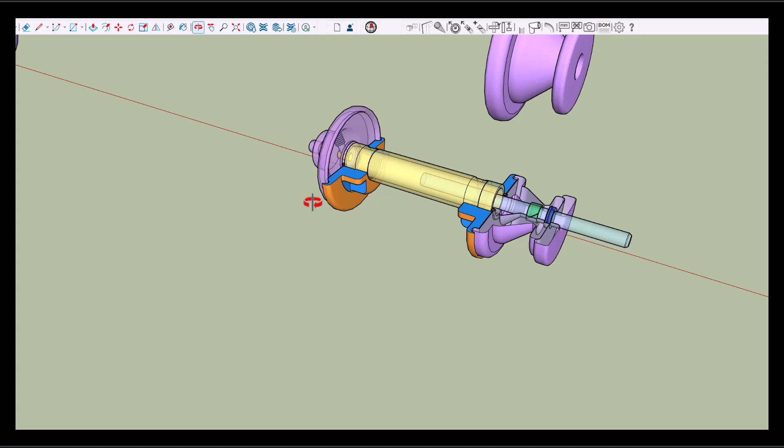Okay, well, that's probably enough. I will send this to you as a video, and I'm going to work on these a little bit and make sure that I get it just exactly the way I want it. I'm beginning to think that I have to move this down, and I'll be interested in your judgment on how much bigger this should be than that, so you don't wind up making a structure where you can't get it to go together because it's too tight.